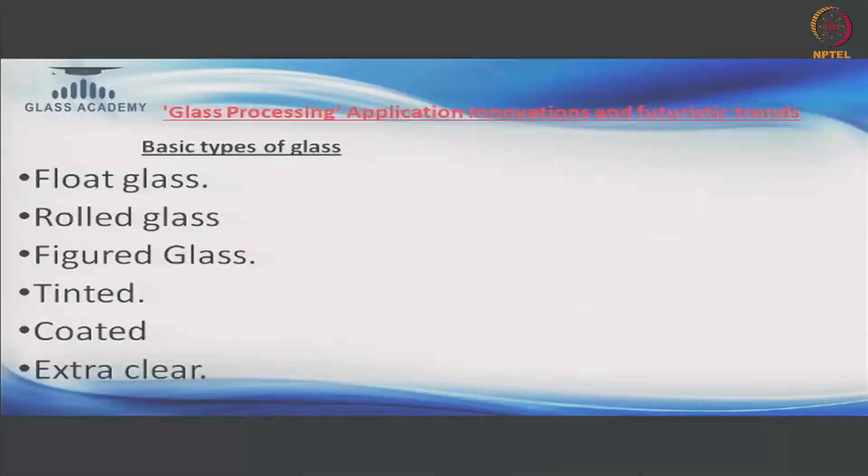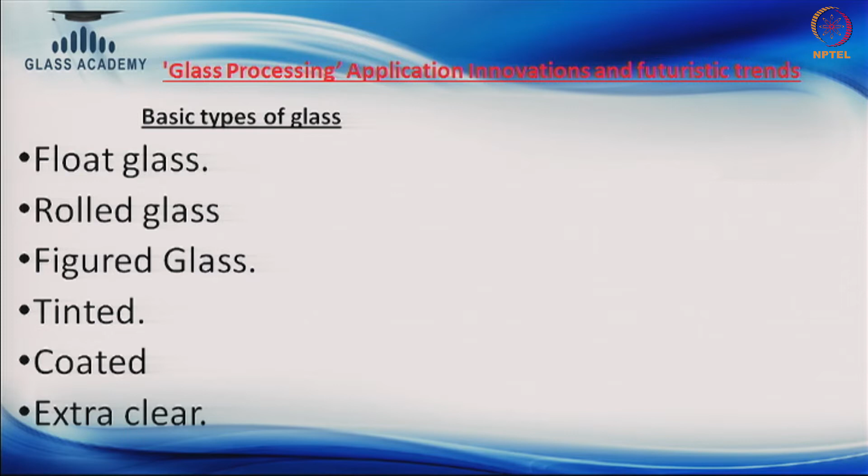Before we start this lecture proper, let us recapitulate what we have learned before. I take it that you all know the basic types of glasses based on their manufacturing process, like float glass, rolled glass, figured glass, tinted, coated glass and extra clear. They all have their separate requirements and separate applications. You all must understand, but today we will not be discussing these points.

Next, you have understood glass based on processing. So, tempered glass, also called toughened glass. Another variant is heat strengthened, laminated glass, insulated glass. Insulated glass provides insulation from heat as well as from sound. And another type of glass based on processing is called heat soaked.

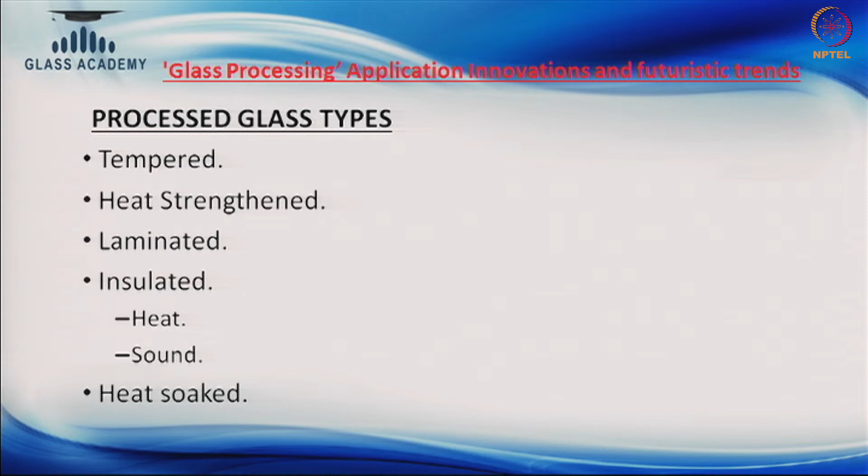Based on application, we also classify glasses. One is burglary resistant glass. This is a type of laminated glass where, based on the threat, we laminate a number of layers of glass with material in between.

Similarly, another application is bullet resistant glass. These glasses are based on the threat level we are designing the glass for. There are many specifications, NIJ specifications, British specifications. So, before selecting a bullet resistant glass, we want to know what the threat is. We will be studying all these topics later on.

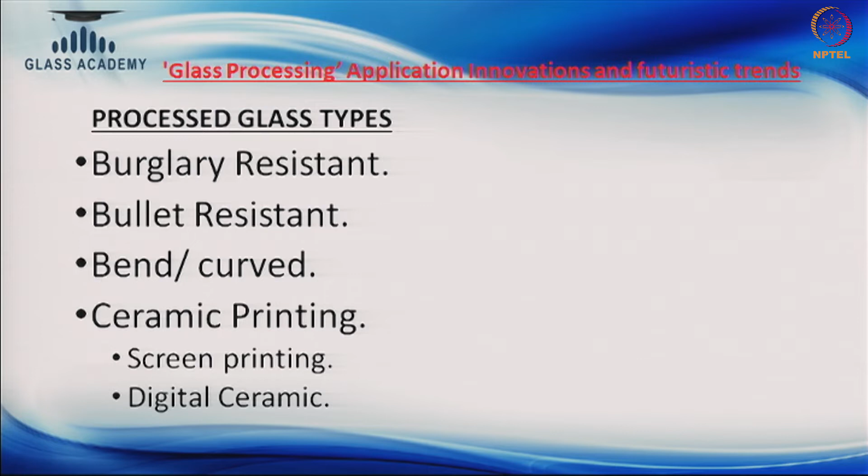Then, based on applications, there is bent glass. Generally we use this type of glass for staircases or decorative purposes, or very prominently in furniture. Another glass process is ceramic printing. Ceramic printing is done by two means, one is silk screen printing and another is digital ceramic printing. So, this was a recap of what we have learned in previous lectures.

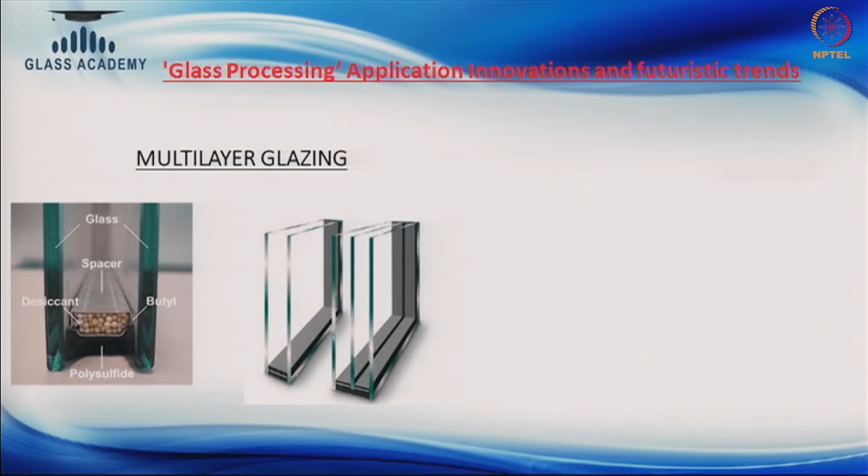Now, we will be learning about the latest innovations and trends in glazing technology. First of all is multi-layer glazing: you have double glaze and triple glaze. As energy is becoming a scarce as well as expensive resource, we want to reduce cost on heating, air conditioning and climate control. So, we use double glaze, but wherever we have extreme temperatures and our requirement is more, we also use triple glaze glass.

Next, we will be discussing a futuristic trend, though some of this material has been available for quite some time. It is suspended film. We call it PDLC. As you see on the view foil, these are used in smart windows. The glass is laminated with a special film called suspended particle film, and when there is no power given to this glass, it looks like frosted glass. But when we supply power, this glass becomes clear.

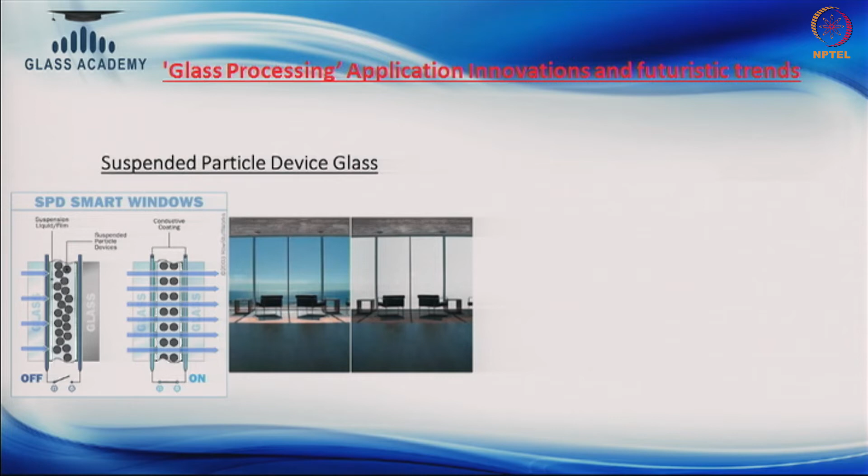In the image, when power is not there, the liquid crystals or suspended particles are dispersed in a random fashion. But the moment we supply power, they acquire a linear order which allows light to pass through the glass. In the image, when it is off you see a totally frosted glass, and when we switch on the glass it gives clarity, though not 100%, something like 70% transparency. There are various usages we will be discussing in due course.

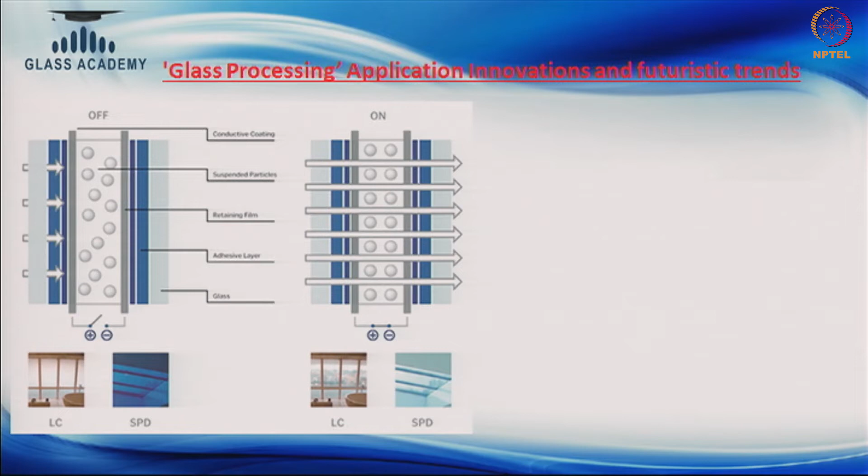It is a replication of the same technology. Somewhere you have suspended particles, somewhere you have liquid crystal dispersal. So, polymer dispersed liquid crystal glass. The working principle is nearly the same, and the output is also the same. When there is no power, the glass looks frosted, or translucent. So, it allows light to pass but does not allow view, giving privacy.

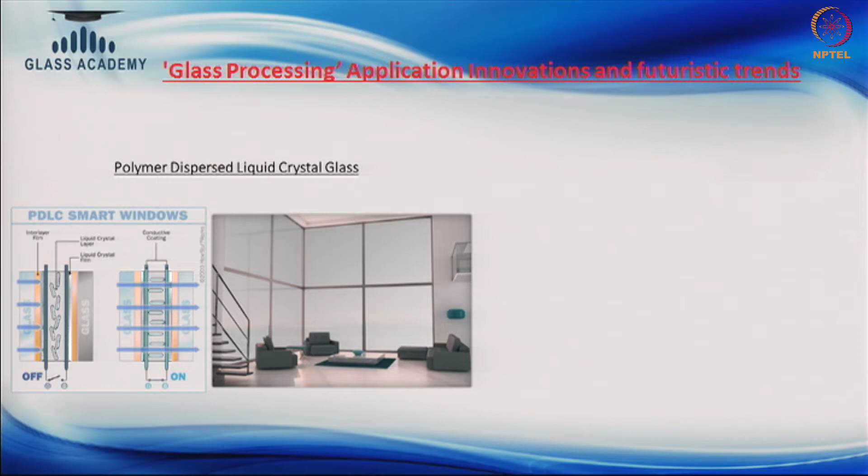A few examples you can see on the view foil. If you see the left window, you will realize that it is not 100% clear. There is some kind of opacity. I will not call it a problem. It is a characteristic of the system.

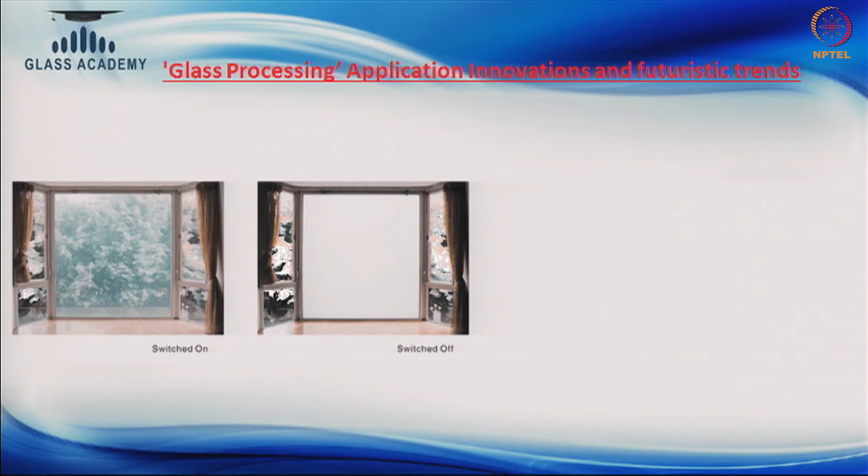As for uses, outside India you have seen people use a glass partition between bathroom and room, especially in hotels. Certain people use a curtain, but in a modern, new setup they use this technology. With the flick of a switch one can make it clear, and if power is not supplied, it will look like frosted glass.

Another technology is vacuum glazing. To control temperature, we have to make a double glazed glass, but based on various parameters, sometimes the glass becomes quite thick. Spacer width, glass width, everything works out such that the glass unit becomes quite wide. So this technology is still under process, under evolution.

It is like a vacuum flask. In a vacuum flask we remove the air between the two layers of glass, and that becomes a bad conductor of heat. So here also, for architectural purposes, if we remove the air, both panes of glass may come and touch each other. So to avoid that touching, there is a small spacer in between.

The main purpose of this technology is to provide a thinner, lighter glass, so that we can save on resources and material. This technology is still a prototype, being developed in Japan as well as China, but commercial production is not yet available. We visualize that in due course of time this will be available, so in future we can make lighter buildings, slimmer windows, and slimmer doors. We are all looking very earnestly towards this development.

Next is low emissivity coating. Though it has been available for quite a long time, sometimes architects or a lot of people are not aware of it, and they only know that it is a very expensive glass.

But what happens when we control energy? We want to reduce our energy spending on lighting and on air conditioning. The common method of reducing the transfer of heat by radiation is by adding a tint to the glass. Or let us go to the foil.

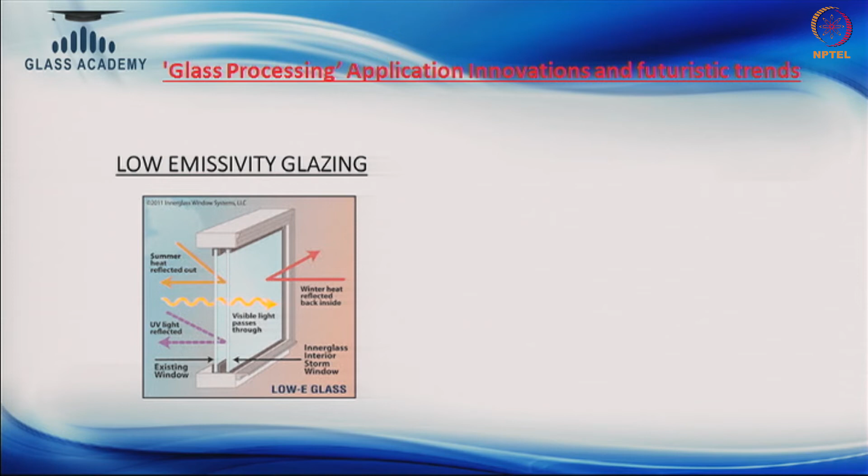If you see on the view foil, there are two layers of glass, an outer layer and an inner layer. In low emissivity glass, the inside layer of one glass is coated with metal oxides which work on the energy spectrum. I do not want to complicate the issue, but I still want to explain.

You all understand the colors of the rainbow, or the colors of light, which is VIBGYOR - violet, indigo, blue, green, yellow, orange, red. The violet side is the cooler side, and red, orange, yellow is the hotter side of the energy spectrum.

When we stop heat by adding tint, we also cut the light. But in low E glasses, what we do is cut this energy spectrum - the red, orange, yellow part of the energy spectrum. So we cut nearly 30% of light, meaning we receive 70% light, and as far as heat is concerned, it's the other way around - we cut nearly 70% of heat. This is very basic, though it is much more in detail, but I think for now for my lecture this is enough - that without reducing the light much, we reduce the heat, and these are the low E glasses.

Their measurement is U value. You will receive a lot of lectures in this course where people will talk about U value and how to calculate and select the glass, but just understand that low E glass is not a futuristic trend, it is a modern trend. It is regularly used in commercial buildings, but in households people have not adopted it in such a fashion because of the high cost. Next we talk about self cleaning glass.

This is in the Indian context a very popular question - is it really a self cleaning glass? The thing is, on a clear glass a hydrophilic coating is applied. So when there is strong sunlight, the glass becomes hydrophilic in nature, so dust does not stick to it. The surface tension is reduced to a certain level and dust does not stick.

But actually in India, when we have rain and mud and so on, it really does not self clean. So I am not saying it is not effective, I am simply saying there is a lot to be done before it actually represents true self cleaning properties.

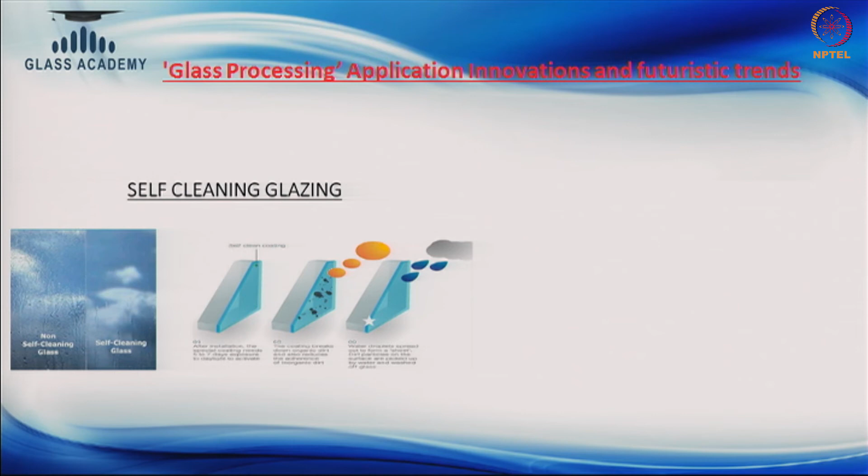Smart windows or smart glass. Smart glasses are based on temperature or light to control the color of the glass. You all have seen photochromatic glasses in optical glass, especially spectacles. This is based on the same technology. Photochromatic glasses for such large applications like doors and windows are expensive, but as technology progresses, this will also become cheaper. There are 3-4 systems.

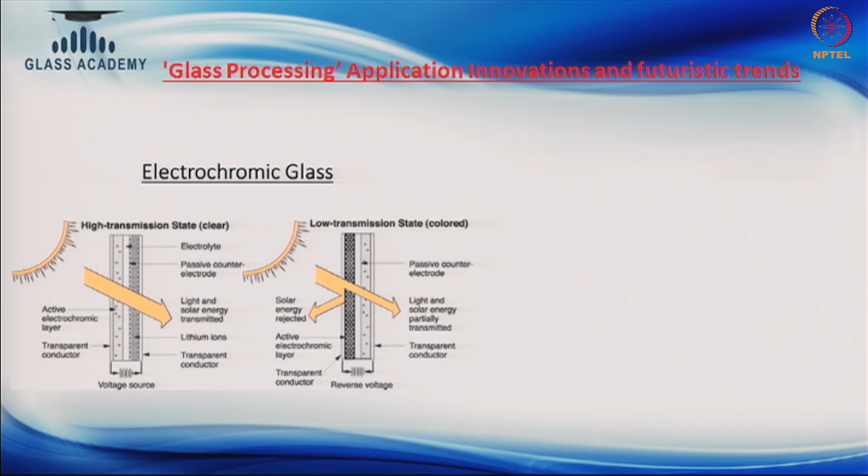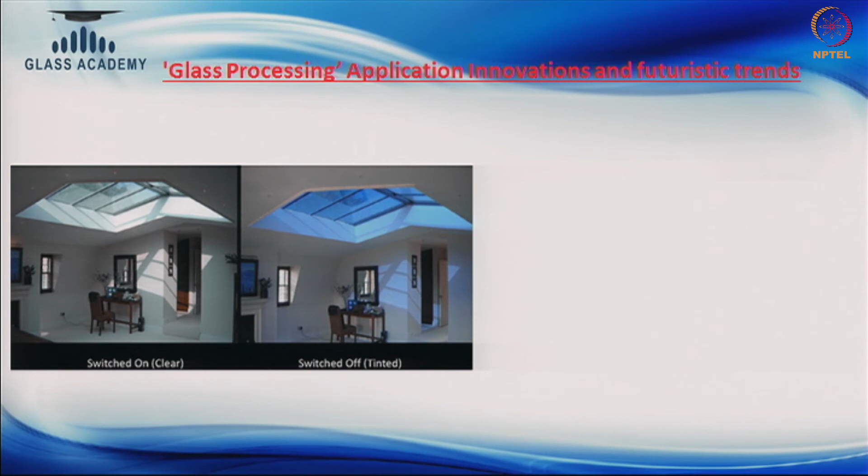Right now the viewfoil you are seeing is electrochromic. When we supply power based on certain electronics, you can control the transparency or shade of that particular glass. Here you can see the left part of the image is quite clear, but during summer or afternoon time when the sun is totally overhead, it is very warm. So we can control the tint of the glass by electric means.

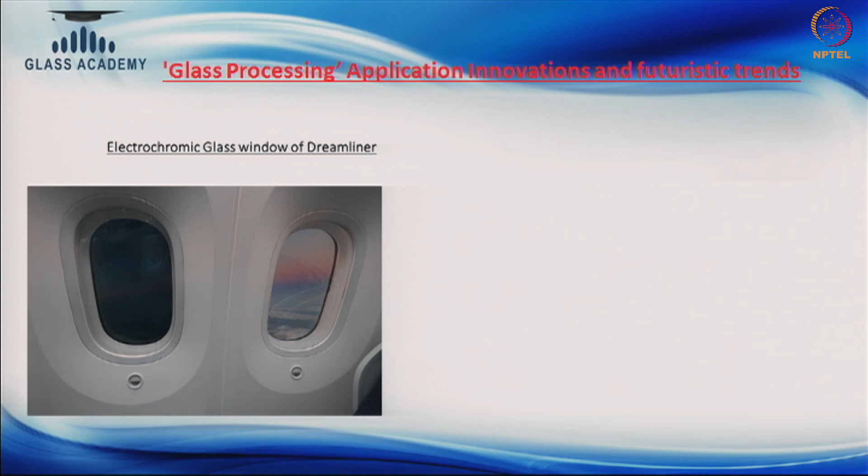All those who enjoy traveling in aircraft, the latest Dreamliner aircraft has all windows made of electrochromic glass, the same thing is being shown on the viewfoil. So you can totally black it out or make it quite clear. There is an electric switch, by pressing that switch you can change the color.

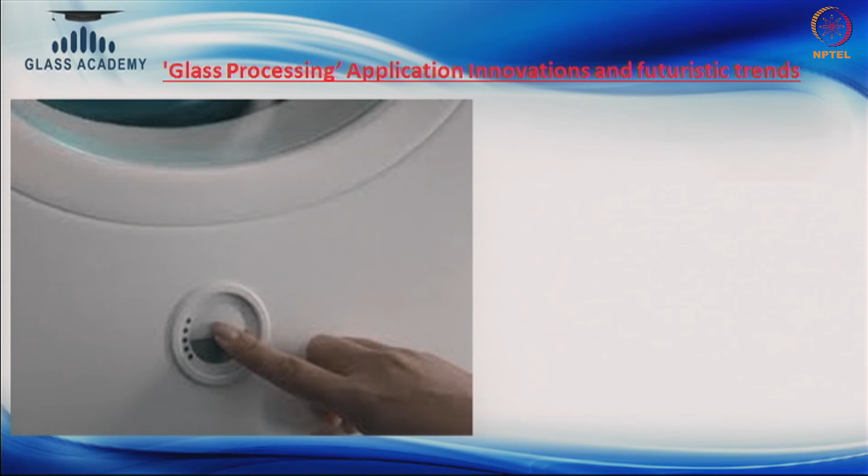As I said before, smart glass is controlled by one of three means: one is using light, that is called photochromic, another is by temperature, and the third is electricity. So: electrochromic, photochromic and thermochromic.

Next, to generate electricity we use solar cells. Right now we are all installing solar power generators on our roof, but we have a facade, we have all the walls of the building which is a big area and receives a lot of sunlight. So building integrated photovoltaic solutions are popular in Europe, and in India it is catching up.

It is a latest trend, and I am sure as the cost of photovoltaic panels reduces, this application will increase. All architects and civil engineers must plan for this in their future buildings, because the price of photovoltaic cells is reducing drastically.

Argon is an inert gas naturally occurring in air, extracted from the air only. Argon is quite popular. If there is a budget issue, we add dry air; there is a performance difference between argon and dry air.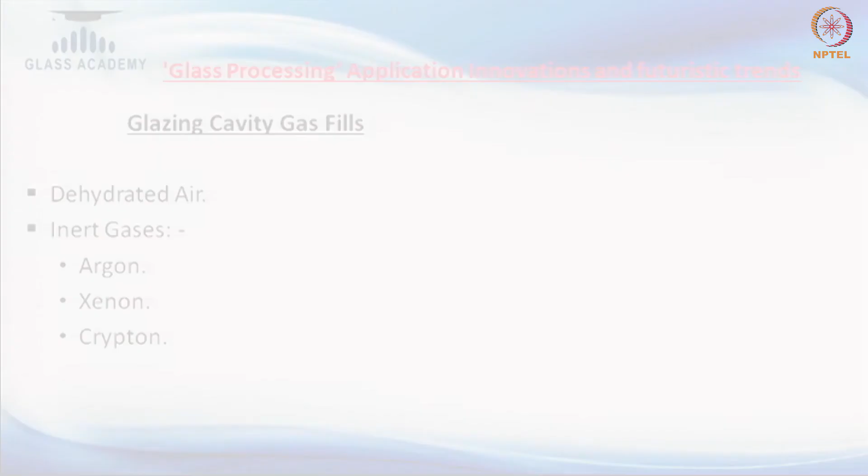Right now they are not popular because they are very difficult and expensive to extract from air, that is why they are not being used, but in future we do not know.

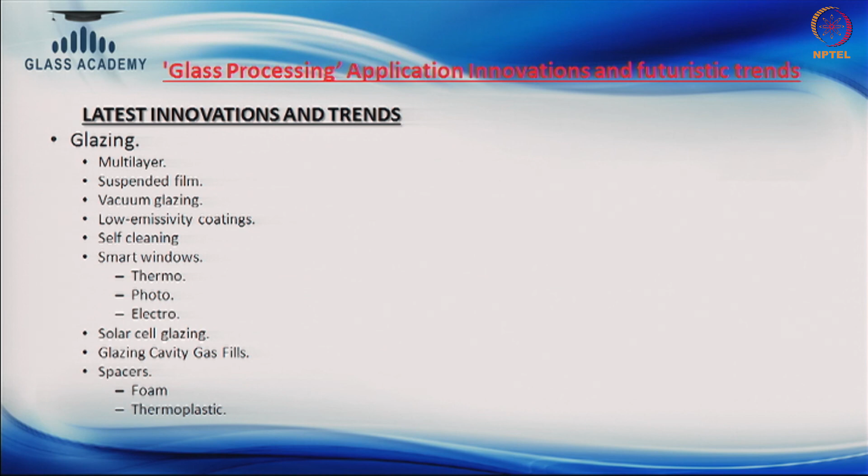Inside that aluminum spacer we fill a desiccant, in our business language called molecular sieve. So if there is a temperature difference between the inside and outside, condensation of air does not spoil the visibility of the unit. This desiccant is filled for that purpose.

Though this aluminum spacer, as you all know, aluminum is a good conductor of heat, though we separate it with a material called butyl, it is still a good conductor of heat. So another spacer is called thermoplastic, or in common parlance, super spacer. Super spacer is a bad conductor of heat. So the insulated glass unit becomes a bit more advanced, with thermal insulation property increasing a lot compared to the aluminum spacer.